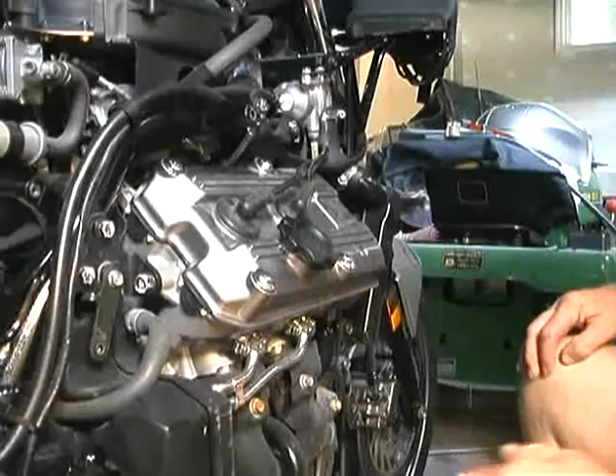What you're seeing here is the starting place. We stripped all of the Tupperware off of the bike in order to get access completely to the valve covers and the top of the head. If you just want to check the valve clearance, you don't have to remove all this stuff, but to get the access that you need to actually do the adjustment and remove the cams, you do have to get it pretty well stripped down so you can get to it. Mostly you need to be able to see.

So starting here, we're going to remove the spark plug wires. Get a wrench here and take these valve cover screws loose.

I don't have a thing, Fred, to put parts in. You see any old newspaper or anything laying around over on the other side? Yeah, I could lay, yeah, that'll work. There's a white plastic bag. It's probably pretty dusty. Some of that stuff there. Nah, that'll work. We're not going to remove very many piece parts.

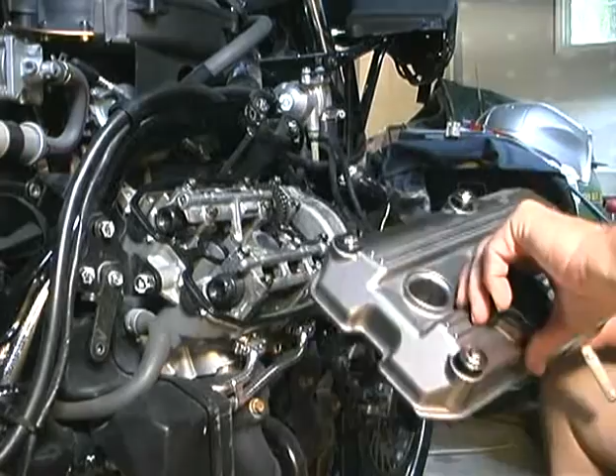Okay, these 4 screws here remove the cover. These 2 actually just hold this front cover onto the back, and if you're working like replacing a timing belt, you only have to remove the front part of this cover. We can get this gasket off here. Probably just going to have to leave it peeled up there.

Okay, what you're looking at now are the 2 cams, intake and exhaust. This is the exhaust cam, this is the intake cam. We'll be measuring the clearances, which are actually, you can see here at my fingers, these 2 valves, these 2, these 2, and these 2. And to check the clearances, you've got to get the cam rotated around so that you're measuring at what you call the base circle, which is the smallest diameter on the cam.

So, need to remove one more piece of hardware here before we start trying to measure this. In order to get this turned to the right place, we need to see where the crankshaft is. We want to get these cylinders into the firing position when we measure the clearances. So, okay, this is on the front of the timing cover, and what's here is a wheel that rotates with the engine, and it's got marks on it to tell you where the crankshaft is.

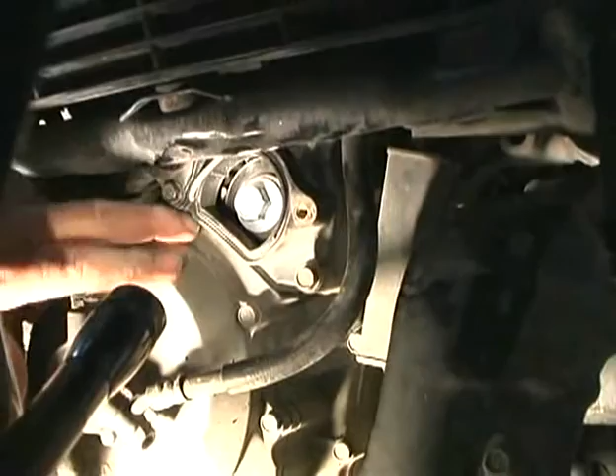They're called a T1 and a T4 mark. And I'm going to have to go back and look in the book again to see which one is for which bank of cylinders. All I can remember right now from what I read was you start with T1. There's a pointer right here that's molded into the edge of this opening, and this is what you use to align the marks to. And now we can find the marks, which are on that wheel somewhere. I believe I see them right there.

It's going to be pretty hard to see those with the video camera because there's just no contrast. They're molded into the front of this black plastic.

Okay, we're having to stop here and take the spark plugs out because trying to roll the motor over and get the marks to line up on that wheel, the place at which the marks want to line up is right where one of the cylinders comes up on top dead center, and the compression pushes it over to one side of the mark or the other, and we can't stop it exactly where we want to.

Okay, with the plugs out, we found that the engine rolls over easy enough that we can actually turn it using the nut that's on the front of that pulley. And I'm going to ease it up here until we get these cam marks to the spot where they're supposed to be. I believe I gotta go one more revolution here.

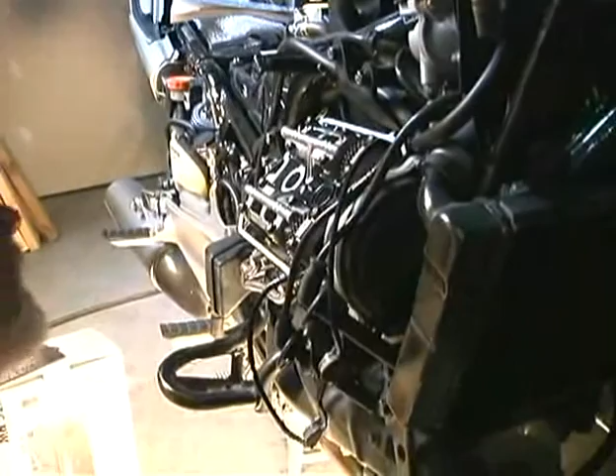Okay. It looks like we're going to have to rotate this engine from valve to valve to get the cams exactly where we want them. What I've always done is when I get ready to measure one is to make sure you've got the lift part of the lobe up on the high part, and that means the bottom side of the cam, the base circle, is against the lifter, and that's where you want to measure the clearance.

So we're gonna get a feeler gauge here out of Peter's shim kit. I believe that it has come with both metric and, okay, this one is marked in both English and metric, and this one is marked just in English, and these blades are a little bit smaller, and that's the one that I think I would like to use. So, no, this is in millimeters. And I believe I'd rather go back to the one that's marked off in inches, in English units.

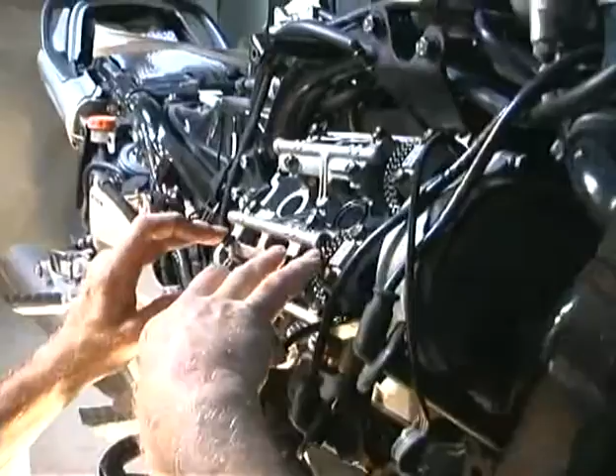These things are supposed to be somewhere between, oh, let's see, this is the exhaust. This cam right here is the exhaust cam, and so all four of these valves are exhaust valves. Two valves per cylinder, or two valves instead of one, just to get the necessary diameter they're looking at.

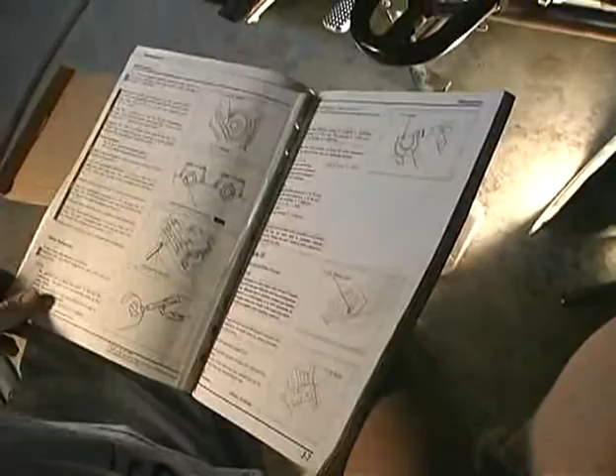Look at the clearance that they want when the valves are closed. Okay, the exhaust valve is supposed to be between 9 and 11, and the intake's between 5 and 7, and so I'm going to shoot for mid-range to loose, which means 10 to 11 for the exhausts and 6 to 7 for the intakes. The reason being, as the engine wears, the valves tend to wear in the seats, and they seat deeper with time.

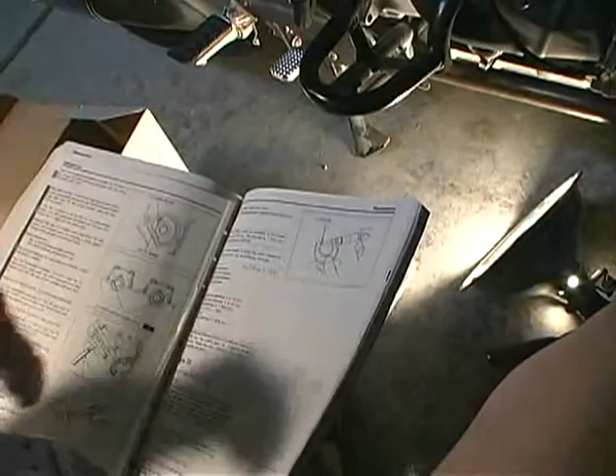And as they seat deeper in the head, they're upside down, they get closer and closer to the cam, so the gap tends to close up. So if you set them, you want to set them towards the larger of the tolerances, or maybe to the mid-range. Okay, let's do some measuring and see where we are.

Okay, we got more than 5. Let's try for 9. We don't even have a good, well, yeah, we do. We've got 9 on that one. And we've got 9 on that one, and 9 is the bottom of the range. That's the minimum that they should be set.

And now I'm going to crank the engine around some more here with this handy dandy little screw. And we're trying to get these 2 cam lobes back here where they are facing up like that. And we got the high part looking at us here, which means the low part is down next to the lifter, and we'll see what we got here. Okay, we've got a good 9 right there.

Now you're going in from the top or something this time. Well, it's just optional on both. Yeah, you can approach it from the top or the bottom, just whichever seems to be the easiest from an access standpoint. We got a good 9 on that one, and then a pretty good 9 on that one.

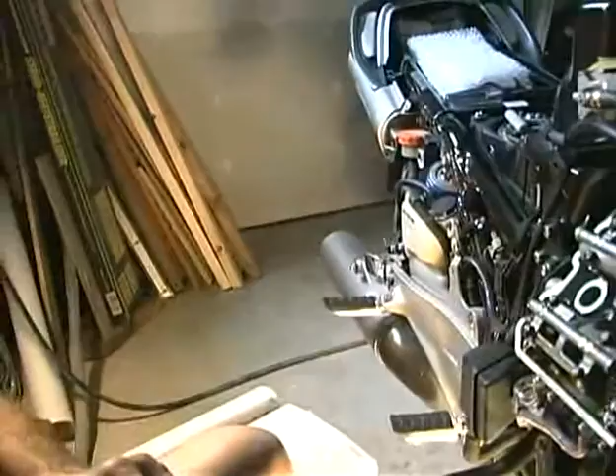So it looks like all 4 of these exhaust valves are set at about 9 thousandths. That's the bottom of the range, and I guess based on what kind of shims are in the shim kit and what kind of shims are in the bike, I may choose to bump those up about 1/1000th of an inch or maybe 2. So what we need to do, Fred, is to get some pencil and some paper and write down what clearances we're measuring in order to know what we want to do when we take the cams off and actually get in there and see.

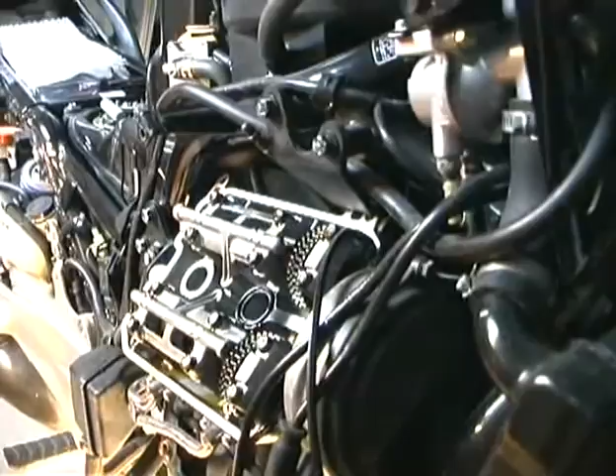Recorded what we had on the exhaust valves, and now we're going to roll around here and put the lobes up on this first cylinder for the intakes and measure them, and they're supposed to be 5 to 7. And we're going to take a look here at 5 and see if we can get a... Show me those lobes. Point to those lobes up, Bob. Okay, right here. I see them. Do you need my flashlight to get a better shot? I got it. I'm not able to get a 5.

You know, one of the problems you have with feeler gauges is the thinner they get, the more flimsy they get. And it's really hard to get enough pressure on it to push it in there. I might say a word about the feel of these things. If it just slides in there, and there's no friction at all on the blade when you've got it stuck in here between the cam and the lifter, and you can just slide it in and out, that's not the right gauge. You need to go one thicker.

The one that's right is one where you have to exert a little bit of force and maybe wiggle it a little from side to side to get it in there between the cam lobe and the lifter. You don't have any fear of pushing the valve open just doing this with your fingers. If you can get it in there at all, you can be pretty much assured that that's about what the clearance is. But you definitely don't want the case where it just slides in and out with no friction on it at all. That means you don't have a thick enough blade yet.

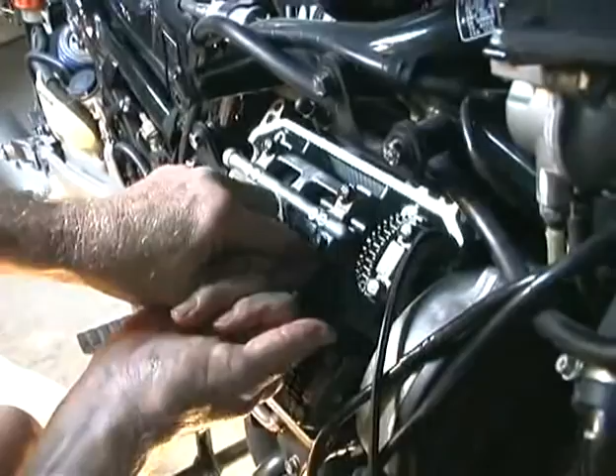My guess is that it probably is something in the neighborhood of maybe 4 and 3/4 or so. But I'm having a hard time getting a 5 blade to go in there at all, so I'm going to call it a loose 4, which means that's a little bit below the minimum clearance, and so we want to do something to that. And I'm just going to write down 4 plus here as a setting. And now we're going to crank the motor around a little bit more.

Now you're not looking at any marks? No, I'm not looking at the marks. I'm just watching the cams for this part. Is there some other part of the procedure where you look at the marks? Yeah, when we get ready to take the cams out, we're going to have to look at the marks. Okay. So I'll roll this one around now until I've got the lobes up at the top, and we'll measure the other 2 intake valves on this side and see what we got there.

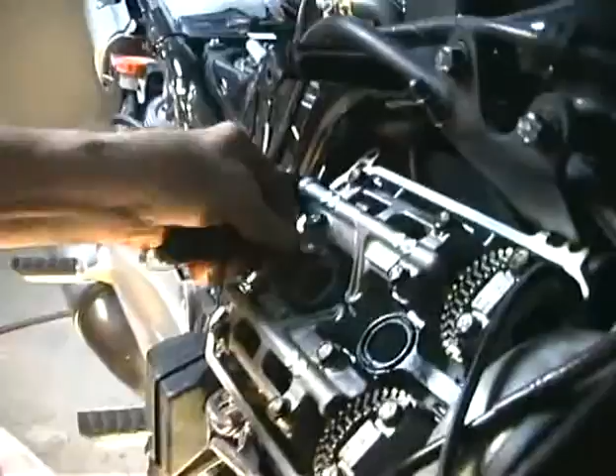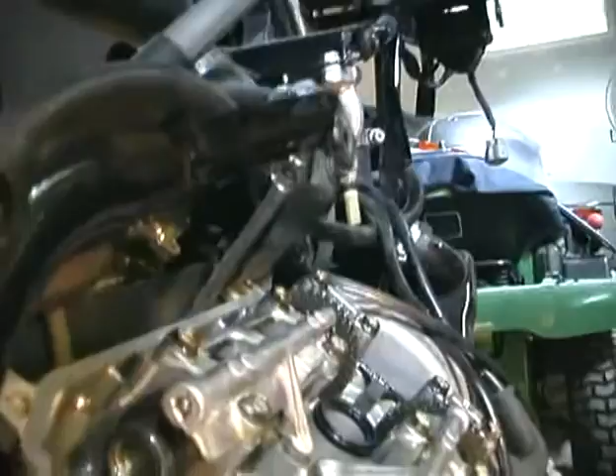Really not able to get a good shot of what you're doing. Well, come around to the other side. I don't know if it would help any, but yeah, I think we can get it. There's plenty of visibility on this one. What we're going to get right in here. Can you see? Oh, yeah.

This area here, this is the bucket as it's called, which is sitting on top of the valve stem, and then this is the cam lobe, and what we're measuring is the gap between this bucket, right in here, and the cam lobe. And we're trying to get this feeler gauge stuck in there. That's good. And this is another case where I can't get it pushed in there. And we'll try. Now this one goes in with no problem at all.

And this is a 5. So we'll go to 6 and see how the 6 will work. This one may be one we don't have to adjust. Oops. Lost it. Yep, 6 slides in there. Just about right. So we're going to leave that one alone. Thank goodness we got one on this side. That one's 4 plus, and that one's 6. And it will be satisfactory, I think.

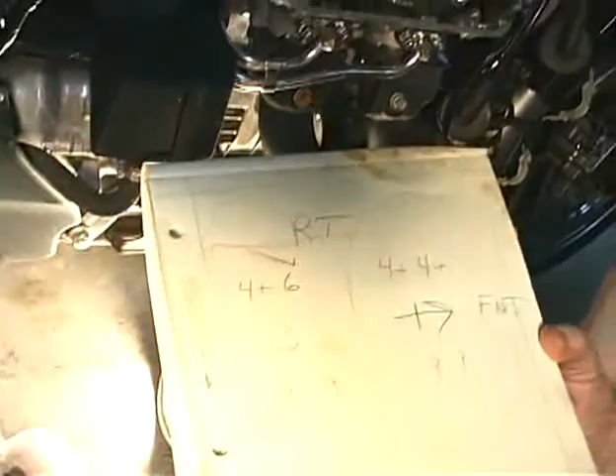Fred, I probably ought to mark on that. This is the right side, and this is the front. And what that means is that this is cylinder number 3 back here, and this is number 1 up here. Okay. And over on the other side of the bike, we're going to have 2 and 4. So these are our clearances. This is the cylinder number. This is the intake up here, and these are exhausts down here. Gotcha. Okay.

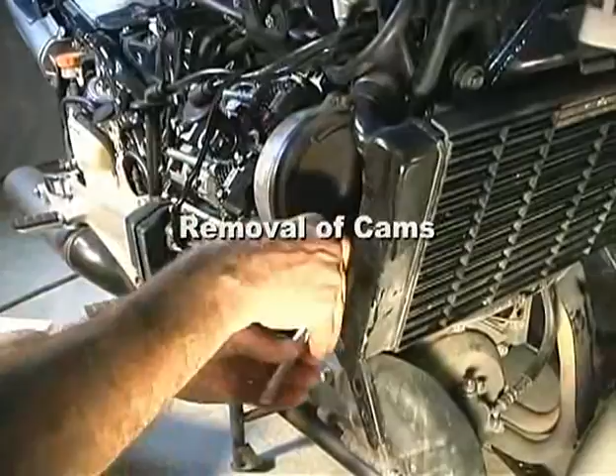Now I need to read a little bit. Turn that off. Timing case cover off here in order to be able to see where we are. The manual says that we should do that. There's 3 screws holding it on. Well, now, distinguish between looking at these marks and looking at those marks. Well, they'll all line up. Everything will line up when it's right. And it's just kind of a double check.

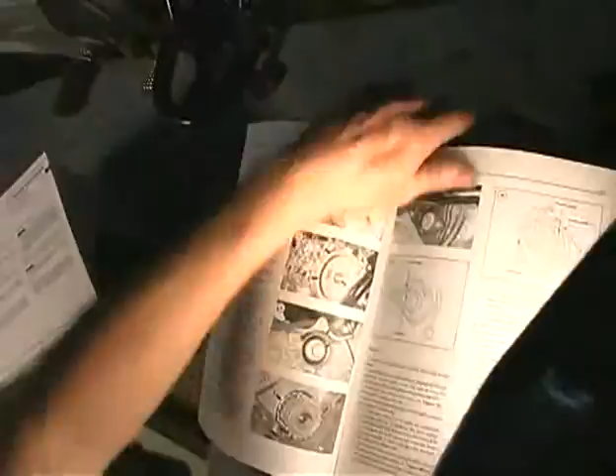Okay. Since the cams are driven at half the crank speed, 2 revolutions of the crankshaft is 1 turn of the cam, and so you got to figure out which revolution of the crank puts the cams in the right place, and that is unique to this mark right here. Okay, we're going to go back here now and try to get the T1 mark in this little hole lined up, and see if that puts us in the right position up here at the top.

There's 2 sets of marks on this wheel. It's what they call a T1 mark and a T4. That's definitely the one right there. And say again what you just said. Well, we're checking here to set the T1 mark at this pointer because we're working on the right-hand cylinder bank. If we're working on the left hand, we'd be setting the T4. And we're going to come out here and see if we've got the cam in the right place.

Now we got to do some searching here. I believe that we do not. Let's see what the book says here. The T1 mark is in the correct position down here, and now we're checking this pointer, which you can just barely see here on the edge of the case, and this mark right here on this cam. There's a notch right there on that tooth. And we're checking to make sure that those two things are lined up.

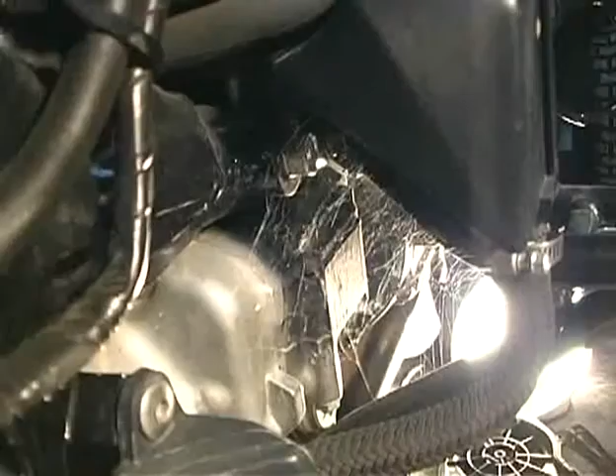Hello, what is this? This bike has not been ridden enough lately. That's clear.

Okay, what we're going to do now are just some precautionary measures. We're going to block some of these holes that go down where the spark plugs live, and at the bottom of that there's a hole that goes right into the top of the cylinder where the spark plug screws in. We don't want to drop anything in there. And this is an oil drain hole right here. It goes all the way back down into the engine crankcase, and we sure don't want to drop anything down in it.

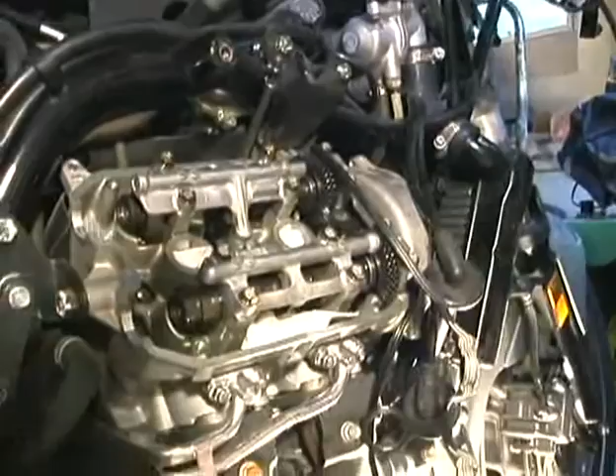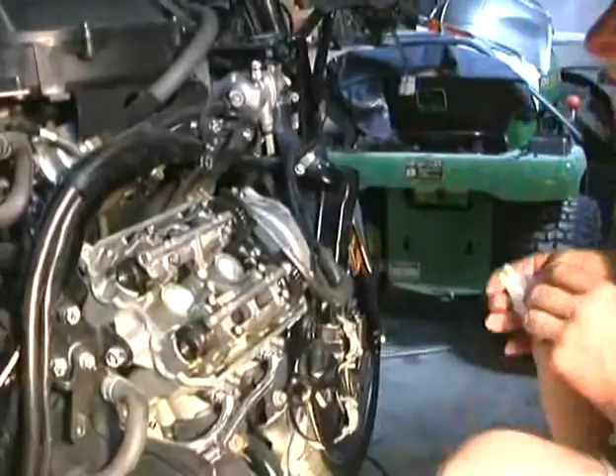And I don't know whether there's a bolt everywhere else, I think. I don't think I see any more places where we're likely to drop anything. So the next thing we want to do, and I don't think this is anything that is in the manuals, it's just something that has been recommended by some of the listers over time, is to mark the actual area here, the teeth, where these cam gears engage with the gear that drives them. That will help us in getting the cams back in there in the proper place.

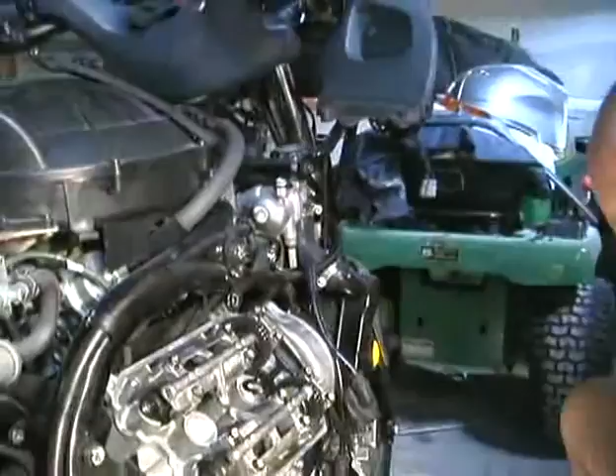If you look at the front of these cams, you notice there's two sets of gears here. There's a front gear, and then there's a gear behind it, and these are spring loaded relative to each other, so that they put a counter opposing force onto this gear, so that there's no end play in the cam. It's always firmly in contact with this, and when we lift the cam out, these gears are gonna move just a tad with respect to each other. So we're gonna mark a couple of things.

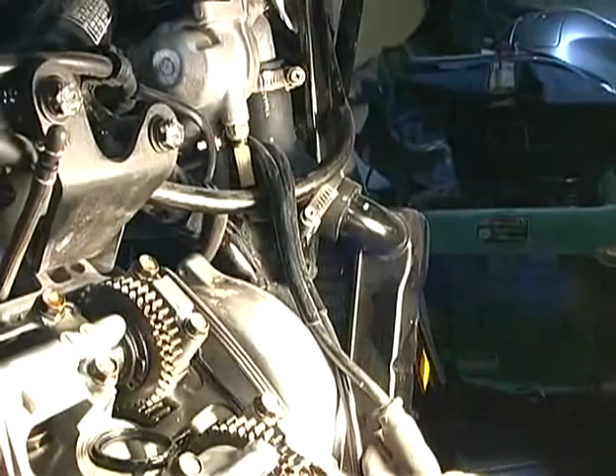I got some acetone here, but any kind of good solvent will work. One thing I'm going to do is get the grease off of the top of those teeth right there, and I'm going to get the grease off of this one. All this is for is to put a mark on here, so when we put these back together, we make sure that we've got these teeth lined up with each other. I don't know whether it's possible to get one tooth off or not, but we don't want to.

Okay, so let's put, oh yeah, that's going to show up well enough. Okay, now that'll take care of us relative to getting those two lined up. Each other, you mean? Yeah, to each other. See, it's going to rotate. The spring is going to cause this to rotate. I don't know whether it can rotate more than a tooth off or not, but since the back gear is the one that I'm going to mark relative to the driven gear, if it rotates, I want to know it.

So we're going to clean off a spot right there where those two gears mesh, and we're going to clean off a spot on the bottom cam where those two mesh, right down here. Almost get in there, but not quite. Yeah. And then we're going to put some marks on here, and hopefully we got enough grease off. I don't know whether we do or not. There's another Q-tip. Yeah, let's go one more round on that one.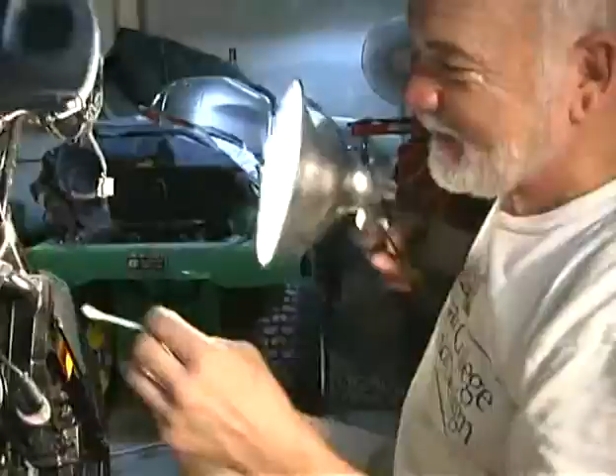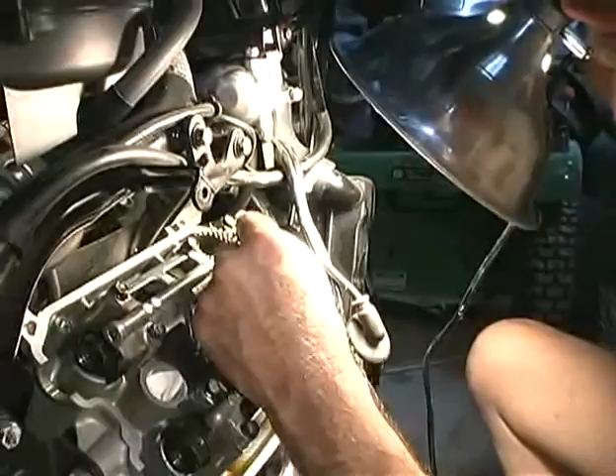You're supposed to say Q-tip, and I'm supposed to hand it to you. Oh. As in the operating room. Operating room. That little thing is in the damn way. Do I need to hold it? Well, use of that one word got us to PG-13. What's that? Damned. Oh.

I doubt if we can make it to R. Oh.

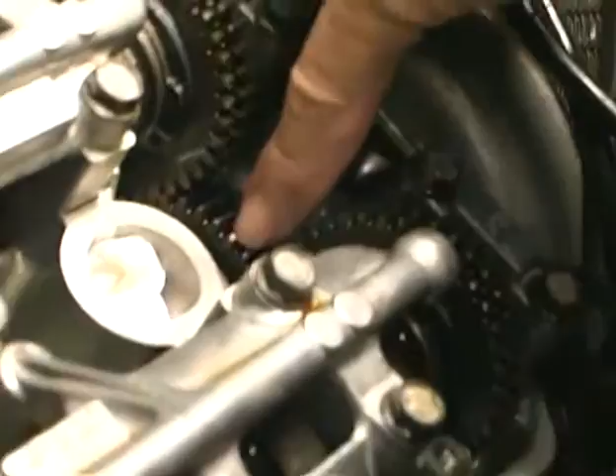Okay, we put a couple of marks down here, and I don't know whether you can see well enough. It's a red magic marker, not my choice of color, but it's the only one I could find, to mark the two teeth that mesh there, and also to mark the two teeth that mesh down there. And there's one more thing. I'm going to mark a red mark right there and a red mark right there that line up with these teeth. And so surely with all of those marks we're going to be able to get it back right.

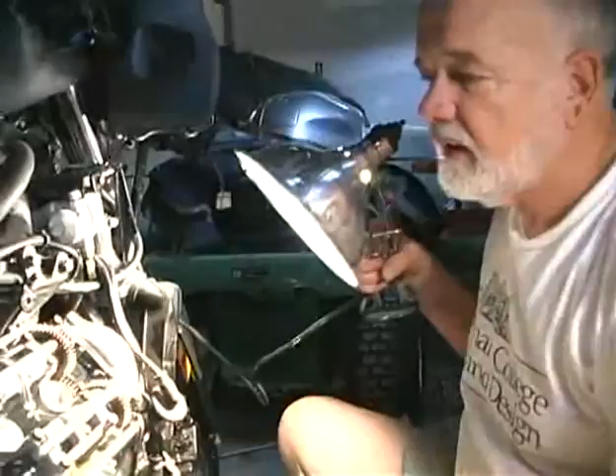The one other thing I'm going to do is mark these four center bolts with red because they are shorter on some motorcycles, and I don't remember whether this is one of them or not. Won't know till we take them out. They are shorter than the four outside bolts, and if you get them in the wrong holes and put the long bolts in the short threads, you can twist the bolt off before you get it tight, just thinking that maybe there's some friction in the thread. So it's kind of important to get these bolts back in the hole that they came out of.

And so now we're going to start removing these cams. If you'll notice, this cover's marked with an I. That's the intake. This one is marked with an E. This is the cover for the exhaust. These front caps are also marked E for exhaust. Well, now they're both marked the same. They're marked I and E. This looks like the same part number, so it does matter after you have some wear on the bike whether you put these back in the same place or not. So we want to be careful and get these back in the same position. So I'm going to put a U on this one for upper, and an L on this one for lower, just to make sure that we don't get those mixed up.

And now we're going to remove these cams, and the only thing to keep in mind when you do that is that there may be a little bit of valve spring pressure on some of the cam lobes tending to move this cam slightly up out of its bearing. So it's important when you remove these to just loosen them all evenly and continue to do that as you take the cam out. We got them all broken loose now, and we're just going to give it like a quarter of a turn, quarter of a turn, quarter of a turn.

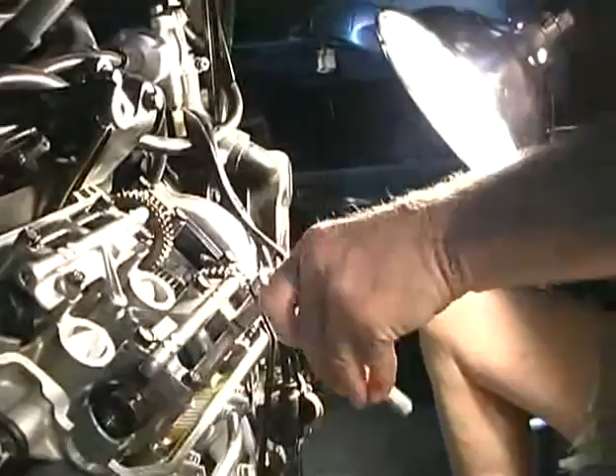The exhaust one is going to come off by itself without doing anything up here? Yes. Okay, it looks like we've got a good position on the cam because nothing is tending to want to jump up at us. So I guess we've got the lobes located at about zero. Well, there's a little bit of tension on that one. This may be the only one that has. Okay. We'll find out about the lengths of these bolts in just a second. I'm going to put this light down. Okay, we've got all the bolts loose now.

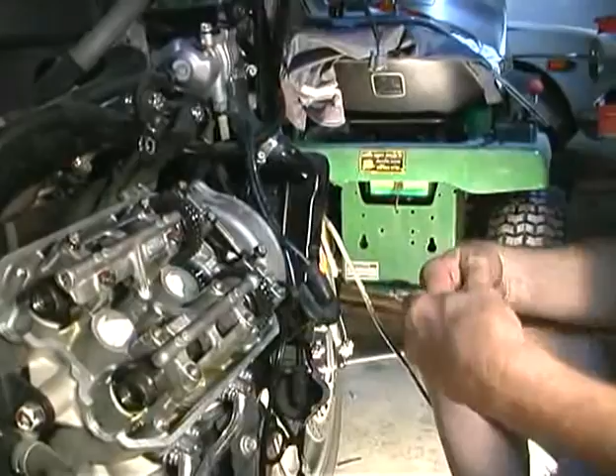We're going to start taking these out, and sure enough, there is a difference in length, and that's why you want to make sure that you get the shorter ones back in the shorter holes, and they're going to be the 4 inside holes, and then all the others should be the same length. So we'll only have to pay attention to the 4 that have the red tops, and there's 2 per cam. Yeah, the red marks that we put on there. So we'll set these down somewhere out of the way, and we should be able to lift off this cam cover if we can find the appropriate tool to prise it with.

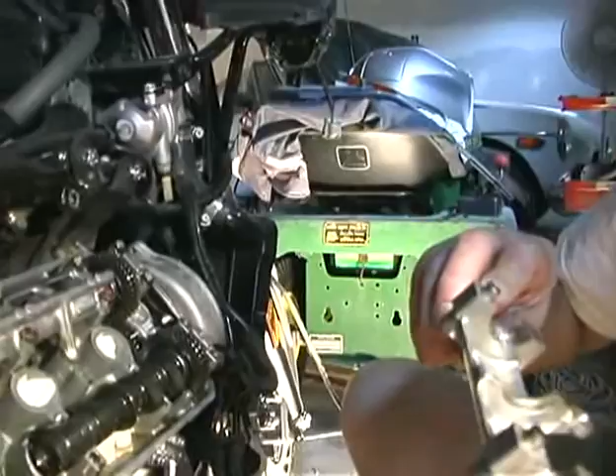Alright. Why is there not some action happening there when you're trying to lift it? Is this gear going to turn as it lifts out of there? Don't know. Something happened. Okay. What's that part called? I think it's just part of the cam mechanism that holds the cam in place. I thought the whole thing was going to come off in one piece. Oh, look at that, would you? Here's this one. How'd you know that little tap on the end is going to break it loose?

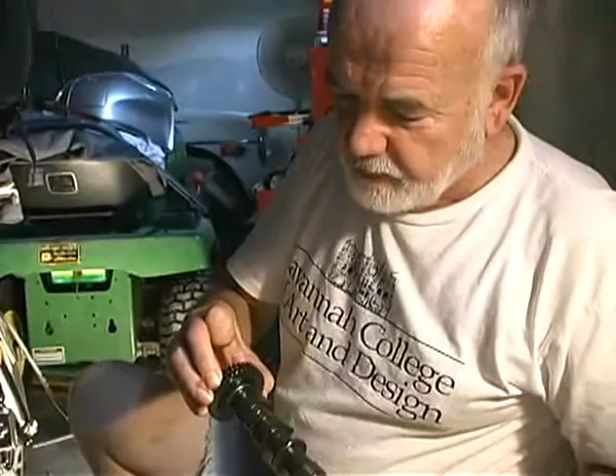Well, it's just kind of like a main bearing cap on a motor, and that's kind of the way you get them out. So we're going to lift this thing out. If you notice, these did not move all that much. These two, they're not aligned anymore, they're slightly off from each other. But we'll make sure we put them back together and get them lined up, because somebody on this ST list put his cams back in and forced this in the wrong direction and actually chipped a tooth off, and I think had to buy a new cam. So it's something to pay attention to.

And this we need to put somewhere where it will stay relatively clean. And now we're ready to use another item out of the shim kit that's in the purple box. You see the purple box anywhere, Fred? I think it's in there. There it is.

Are you going to do the exhaust completely before you move? I'm going to take a look in the exhaust. We won't put it back before we do the intake, but we're going to go ahead and... I'm talking about the shim part. If you have to change the shim, you're going to do that now? No, I'm just going to look at what shims are there.

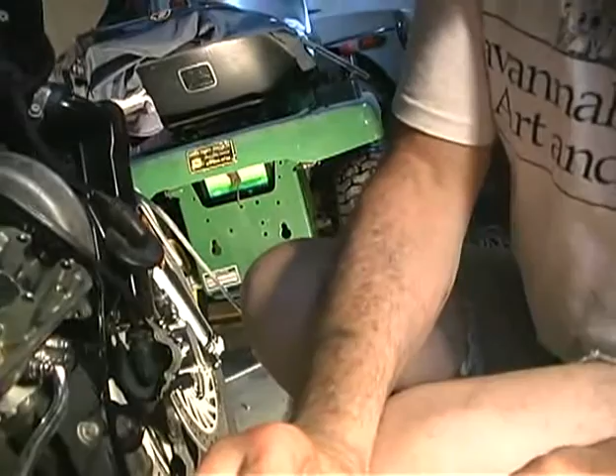This little suction cup that's in the kit is for the purpose of grabbing these buckets and pulling them out. Oh my gosh. And you're either going to find the shim in the top of the bucket, which is where it is in this one, or the shim is going to stay on the top of the valve. What you want to do is make sure that you don't drop it. You want to make sure that you've got it. And we're going to take these out and set them down here in the order that they come out.

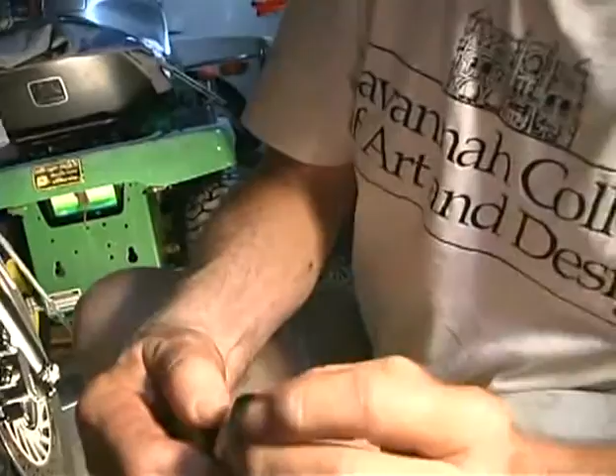Okay, that one is in the bucket. That one is in the bucket. It's just stuck up there. Oops, you can break it loose with your finger. And this one. It too stayed with the bucket. So there are the 4 exhaust ones.

This is, I would say, serious, high-level shade tree work we are doing here. Probably the most impressive shade tree work I've ever seen.

All right, now we're gonna take the top cam loose if we can find the right tool. This is a repeat of... Needless to say, the cams are different. You don't want to get them swapped with each other either. So we'll try to keep them straight. I'm sure they're marked somewhere, but I'm not sure I want to take the time to try to figure out how they're marked or where they're marked. I think it would be easier just to take the extension out to do that one.

Looks like you're about to run out of space on top of this white box to put stuff in. The big old thing, something. Oh, yeah.

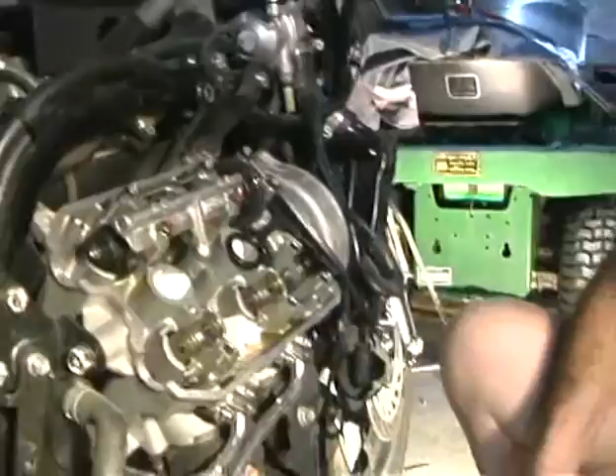Interestingly enough, this little appendage right here is an oil passage, and when the engine's running, oil is squirting up through here and along this gallery and then coming in through these holes in the top to lubricate the cam. I guess turn it off, Fred, and we'll shut the cam off. I guess the next thing we'll do is go in there and look at the shim values that we have. They're all stamped, but I suppose it's possible with wear for the markings to wear off of them, but none of the ones in the kit seem to have lost their marks, and I'm sure some of them have come out of somebody's bike.

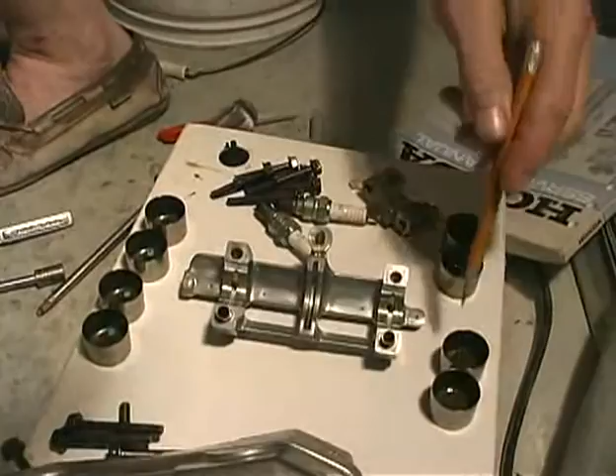A new sheet here. Okay, you ready? Okay, we've got the other intake cam off, and we've removed the 4 buckets there, and we've got them all sitting here upside down, and the next thing we're going to do is to take the shims out of these buckets and record what values that we have. So I think we'll just duplicate what the inside of the head looks like, and we're going to write shim values in each one of these circles.

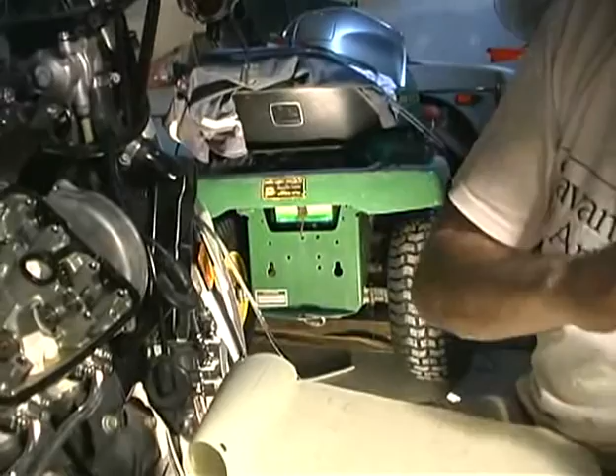So we'll start with this first one right here, and I may have to get you to help me read these, Fred, but is that 215? Yep. Okay, 215. It was a little bit worn too, looked to me like. Alright. What units are these measurements, by the way? That's 2.15 millimeters. Oh, 2.15. I believe that's the way they're marked. And the reason they are different is manufacturing tolerances? Tolerance on the valve length, on the base circle of the cam, and wear. How interesting.

There's a 2. Look at that one. I think that one's a 228. Yeah. Some big ones. Sure would go down into one of those holes really easy. That's why we put the toilet paper in. Yeah, definitely. I'm sure that it's happened before. It's just a disaster, because if it goes down a spark plug hole, you'd have to pull the head off. If it went down the crankcase, that wouldn't be so bad. You'd just need to find a replacement for it.

Well, this one's worn to the point where I don't believe I'm going to be able to find anything. Take a look. We're going to have to measure that one, and that's why the shim kit has micrometers in it. Okay, for the shim that we're not quite sure what the last digit is, we're going to use one of the micrometers that's in this kit. This is, I guess, Peter's micrometer. It's a metric micrometer. We just checked it here with a known shim thickness of 222 to make sure that we had the right value.

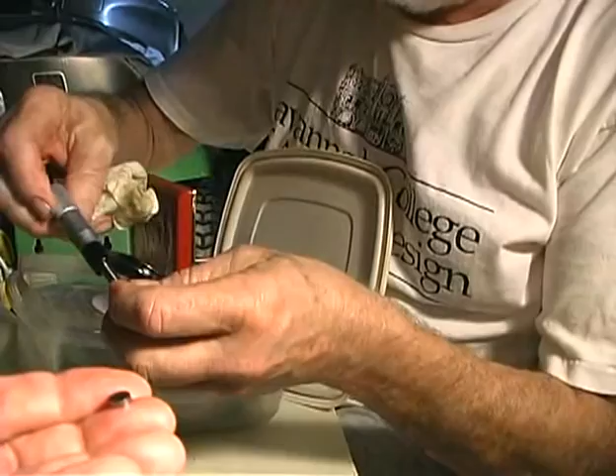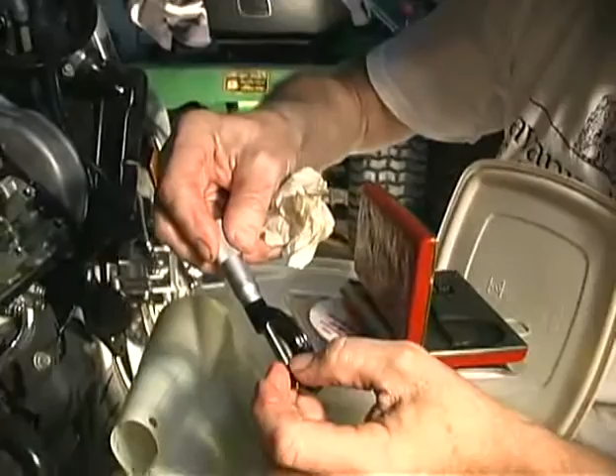And if you notice, we've got two marks visible here past the 0. That's the first 2, and then here's 20, 21, 22. So that one is a 222, and the one that we're not quite sure what it is, we're going to put it in here and give her a twist and see what we wind up with. Looks like it's a 217 or maybe 218. Is that what you thought it was, Fred?

Either 217 or 218 is what I thought. I think the 218s will measure 2175. I believe John O. discovered that the half sizes go to the next. This one is reading 2175, so we're going to call it a 218 for purposes of what we're doing.

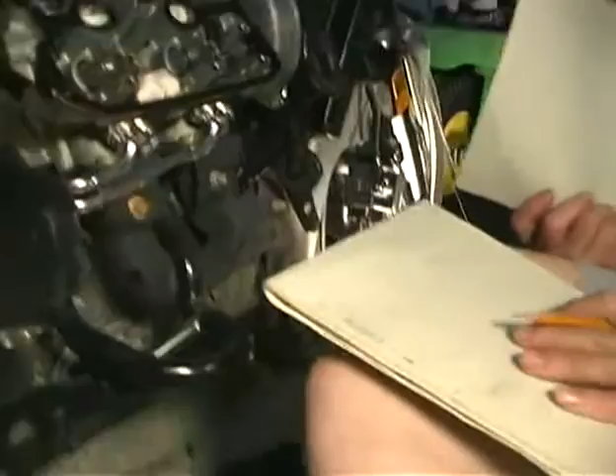Okay, what we're going to do here now is put in the shim size information we have, and incidentally, lots of folks after they do this once will keep a permanent record of what these values are, because that way you can measure the adjustment and know if you need to change your shim, you know what size you need. And with that, if there's not one in the kit, or if you don't know somebody's got one that size, you could order it and have it before you ever started taking the bike apart.

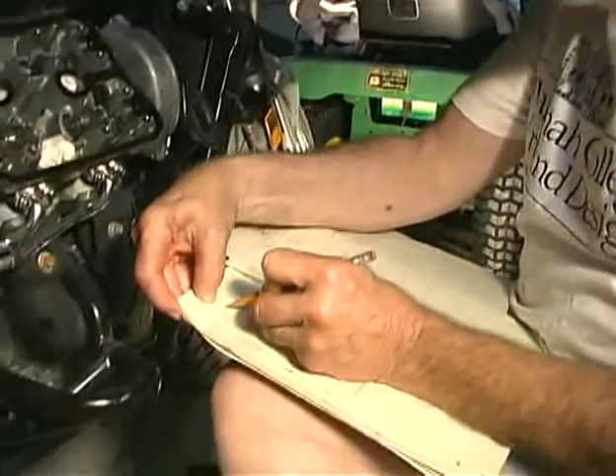What we're going to do is put the clearances on here, and these are in thousandths. And the process is pretty simple. I'd like for this to be a 10. So what I would really like to have is a 221, because I need to make the gap bigger, so I need a thinner shim. I need a 227 here, a 217 here, and a 221 here.

ST1100 shim analysis, take 2. Well, I didn't paint my bike another color. We've actually moved to a different location, and we're redoing something that we did in the original video. It was pointed out to us by Al Barth that it was in error, and he was certainly correct. What we did, and you saw part of it with the music and the sound: I was trying to subtract thousandths of an inch from millimeters and get millimeters, and that's not the way you do it. So we're gonna go through this shim calculation one more time, and this time hopefully we'll get it right.

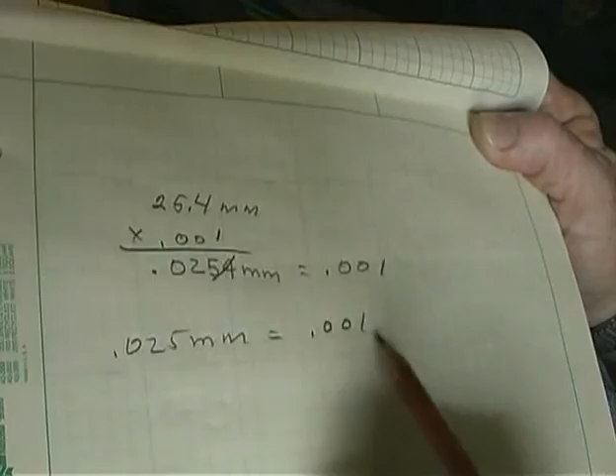So if I want 2 thousandths of an inch increase in my clearance, then I need to make a change here of 2 times that, or 0.05 millimeters. So this is the value we're going to be working with, rather than the 2 thousandths. So if we come back on this page and I've got a 215, I want to subtract 0.05 from that, so this shim should be a 210. This one is okay. This is 6 thousandths. We're not going to do anything to that one. This 210, to change that by 0.05, I need to make this a 205. And this 212, to change it by 0.05, I need to make that a 207.

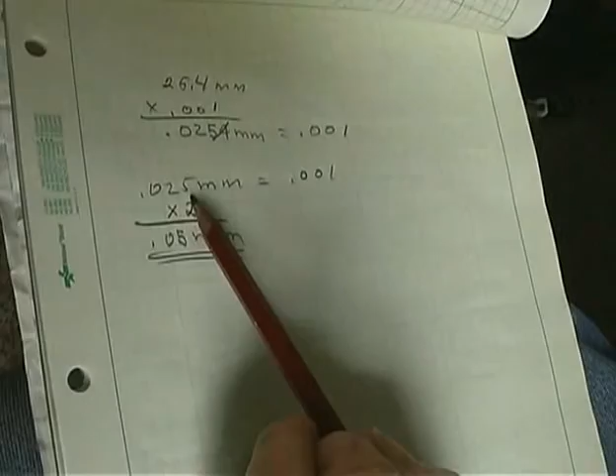7. Same situation exists down here. This is 9. I'd like to get into the middle of the range, which would be adding or taking 1,000th away from each one of these, and 1,000th is 2.5. And so what we have to decide is what we're going to do, because the shims come in 0.01 millimeter increments. So we have to decide if we want to change it 1,000th.

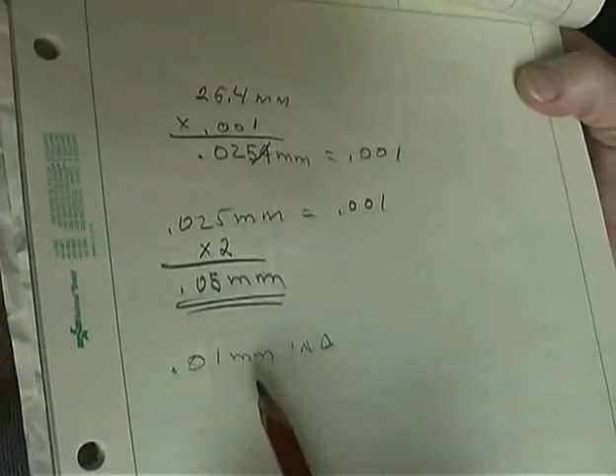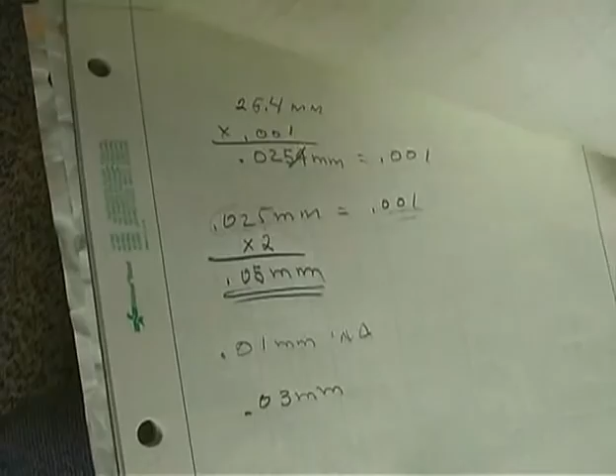We'd need to make a change by 2.5 here, 0.025. And so let's go ahead and round that off to 0.03, and that'll give us just slightly more than 1,000th of an inch change in our clearance. So we'd subtract 0.03 from each one of these, and we'd come up with our new values.

Here would be 219, 225, 215, and 219. And that's changing the clearance by approximately 1,000th? Yeah, 0.025 would change it by 1,000. Okay. So 0.03 is going to change it by about 1,000th, and just a tad more. So these are going to be in the 0.10 plus range, which is okay.

I believe the requirement is 9 to 11. So to get out in a mid range, with a 1,000th plus change, would be just a little bit to the loose side of mid range, which would be 0.10.

Found one shim in the kit that would work, and we can shuffle some shims in the bike, and we can get all of the intakes in good shape. And I think, based on the fact that I would have to buy 4 shims and wait for them, I'm going to leave the 4 exhausts at 009, which is the bottom side of the clearance. I'd like to have a little bit more than that, but just for today, we're just going to leave it where it is.

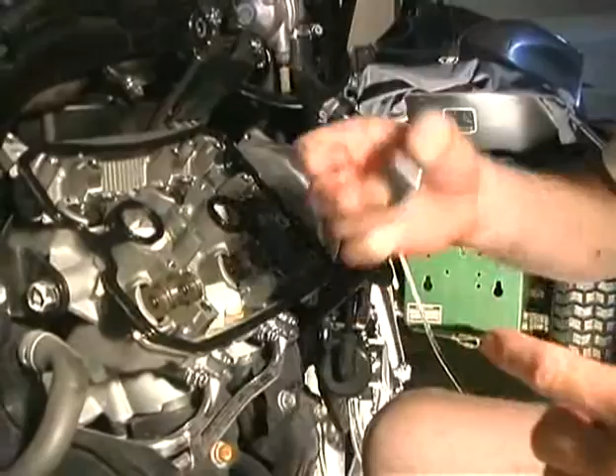When you replace them, you put the shims in these little cups that are in the top of the valves. It'd pretty much be impossible to get the shim centered in this bucket well enough to ensure that when you put it back on, it would go down in the place for it in the valve. So you just put it in there, and you can see now I've covered up that hole, and I'm getting ready to put this bucket back in there, and that'll be the end of that one. Is that the bucket that came out? Yes, it is. It's the one that came out of that hole, and that's important.

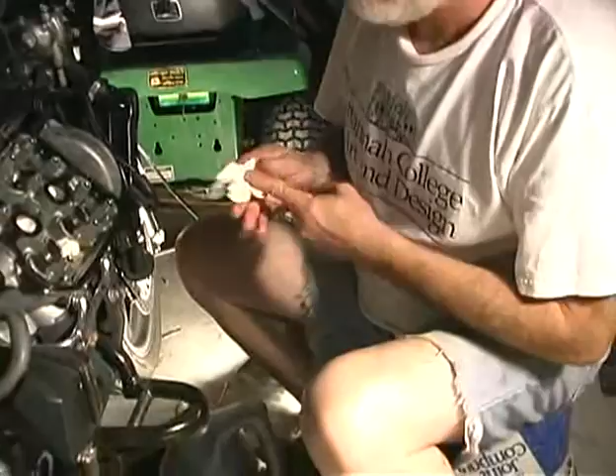We've got all the buckets and shims and everything back in there now, and what I'm getting ready to do now is just one of my old maid precautions. I've wiped the tops of all of these buckets off, and now I'm gonna coat each one with some Mobil 1 here to make sure we don't put the cam back and it have a dry surface to rub against. This is the same red cap Mobil 1 that they use in the crankcase. Same thing, it gets pumped through here when the engine is running.

Are you using that now? Huh? Yeah. Are you? Yeah.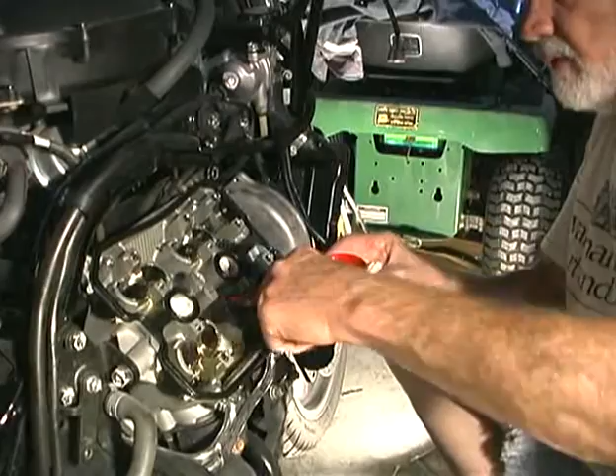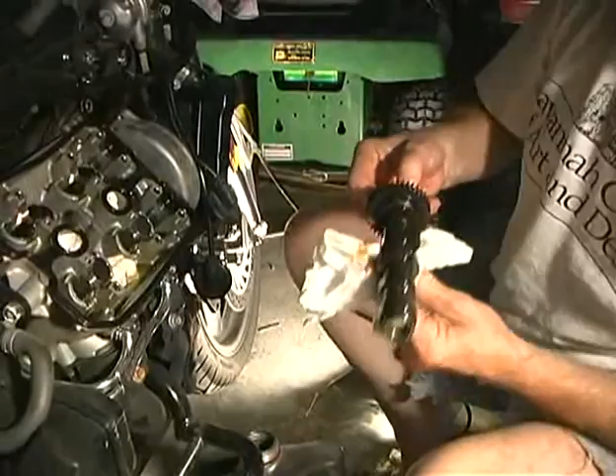I'm also doing this in the cam bearing area, although it looks pretty moist with oil from pulling the cam out, but it can't hurt. Okay, now we're ready to stick these cams back in here, and that may get to be exciting. After you take out the paper. Yeah, probably. This is the exhaust cam, which goes down at the bottom. This is the intake cam.

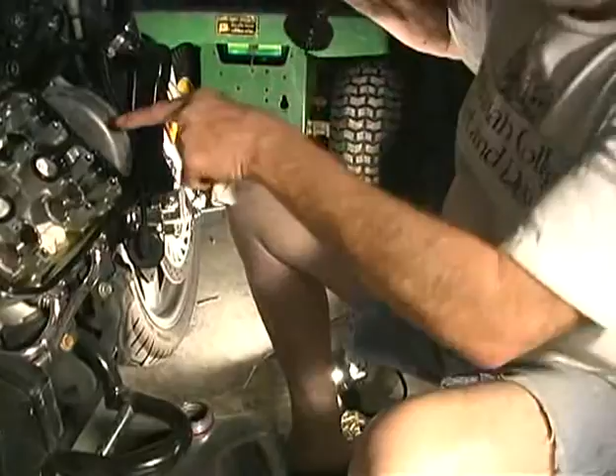Okay, now the secret here is to get the tooth that we've got the mark on engaged in the right place here on this driven gear as we set this cam back down, and to get these teeth lined up. And if we do this right, it ought to all happen kind of at once. I'm going to set that cam in there and see. I believe it's probably about a tooth off, or two. I'm going to rotate it like that, and take a look at it with my flashlight, wherever my flashlight is. And we are a tooth off.

We're going to pick this cam up and rotate it one tooth. And now, whether you can see it or not, I can see it. I don't know about the camera. But we've got our marks back together there. And when we pull it down tight, these marks should come back into alignment.

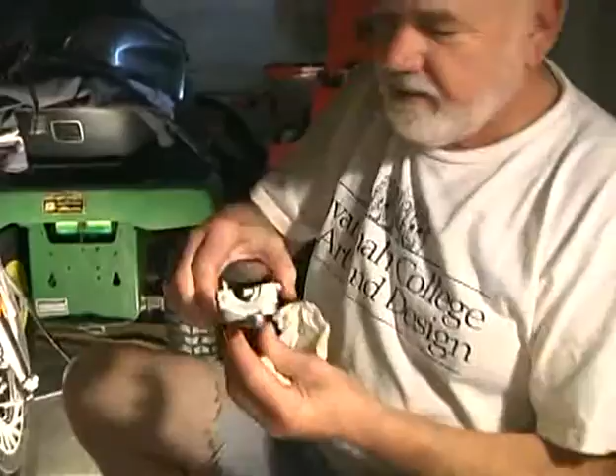So we're ready to put the top cap back on that one. And the only thing we need to do here is make a double check that we do have the intake one and not the exhaust. And we'll put a little Mobil 1 here on that one to make sure we got them all slicked up.

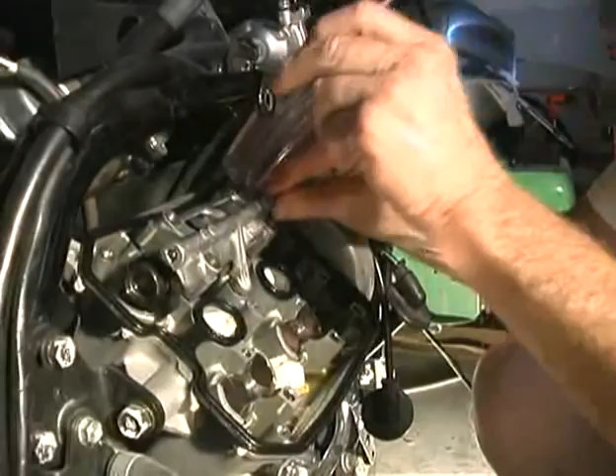And we'll set that guy down. And if we had a soft nose hammer, we'd tap on it, but we don't, so we'll use this screwdriver. And you can tell from the sound of the... no, it's down as far as... it's down. The only thing important when you put these back on is this nose piece, this little gizmo, got to be pointing out, and I think that's probably common sense. You know, that makes the part number upright where you can read it too.

Put a little Mobil One in that guy, and put him down right here. Now we're going to find some screws. I believe these are the ones that came out of there. Find our two short ones and set them here so we don't screw up, and then we'll put these others in place. And we're going to run those all down hand tight, and then we'll start pulling them down in case there's any slight compression of the valve springs.

We'll pull them down a little bit at a time till we get them all tight, and then we'll get a torque wrench out and torque them to the proper value. It's down a few turns or fractions of a turn at a time until all of these snug up tight, and then we'll get the torque wrench out, and this is just primarily not to put any undue stress on the cam. You just kind of go around in a circle, or you can crisscross. It doesn't make any difference. Just need to get them all pulled down evenly.

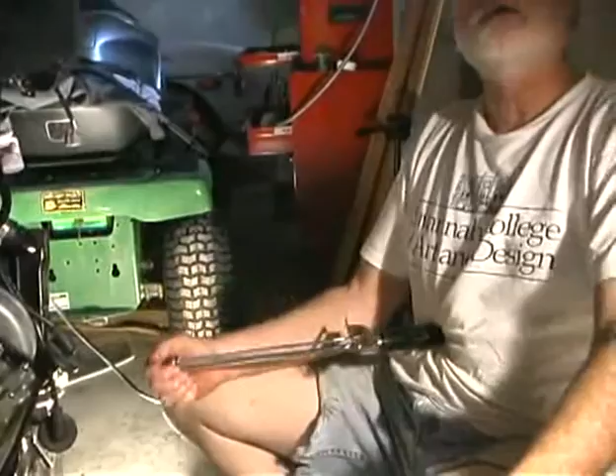Getting close now. Nine foot pounds is how many inch pounds? 108? 9 times 12, yeah, it's 12 inches to a foot, so it'd be 108 inch pounds. Okay, what we've got here is an inch pound torque wrench, a beam style, and we got our torque reading in foot pounds, and so it's 9 foot pounds, and if you multiply that by 12 to get inch pounds, it comes out to be 108. So we'll be shooting to get about 108 inch pounds of torque on each one of these bolts.

I'm going to pull them to about 50, and then I'm going to go back and... Is there an order that it recommends? I don't think there is an order for it, but that's a good thought. I'm going to just start tightening. Since these are two separate pieces... if this was all one cast piece, it might be wise to start in the center and work your way to the ends. That's what you do on a cylinder head on an automobile. But it's just 4 screws, so we'll just tighten them down. We're gonna pull this thing to about 50 first.

There's 50 on that one. 50 on that one. 50 on that one. 50. 50. 50. And what I like to do is just kind of get a wrench and kind of feel how tight these things really are. I'm tightening them a little bit now, but I'm certainly not exceeding the 108. But I just like to know about how tight they are. I always worry about twisting bolts off. Those feel just good and snug now.

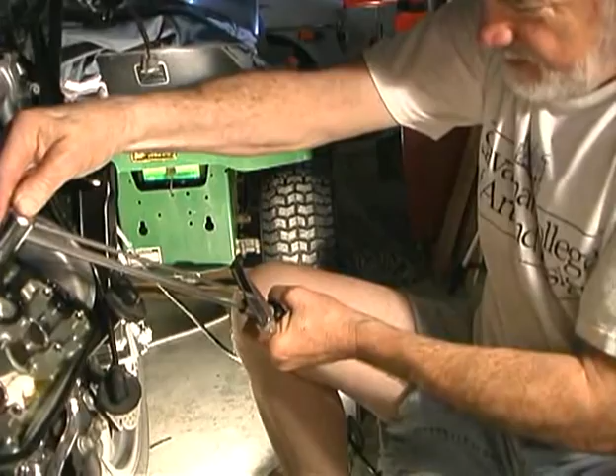Okay, let me look at this thing in some bright light and see what these graduations are. Every graduation on here is 25. So 108 would be a third of the way between those two marks. I don't know how close I can get to that. I always thought those torque wrenches, unless it was just me, seemed kind of crude or something. Well, it's utter simplicity. The good thing about an old beam style torque wrench is it doesn't ever need calibrating. If you got the style that clicks, you never really know whether it's calibrated or not. Really? I usually just check mine against a beam style by just pulling the wrenches against each other.

And we'll let those sit there and stretch a little bit, and I'm going to go back and probably check them all one more time, and I'm just putting another thing of oil on there because that's been sitting a while and it's all run to the bottom. I'm going to pull this thing out here while it's easy to get to. We've got the exhaust cam sitting in here now, and got our red marks lined up with each other, and so we're going to repeat what we just did on the top one.

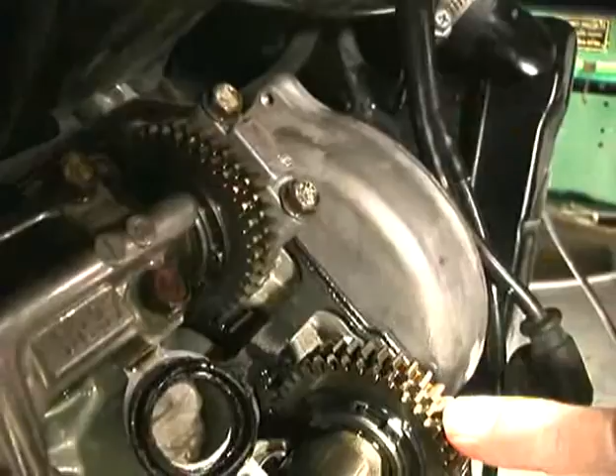Notice how these two now have come back into alignment. Magic. And they're misaligned like this when you start. And I don't understand why torquing it down made them come back. Because we're pushing the cam. It's not sitting in the bottom of this thing right now. Yeah. It's being held out by the fact that this thing is twisted. So as we drive it down in there, it's kind of like watching the minute hand on a watch, but you ought to be able to see these things rotate relative to each other and see that gap close up.

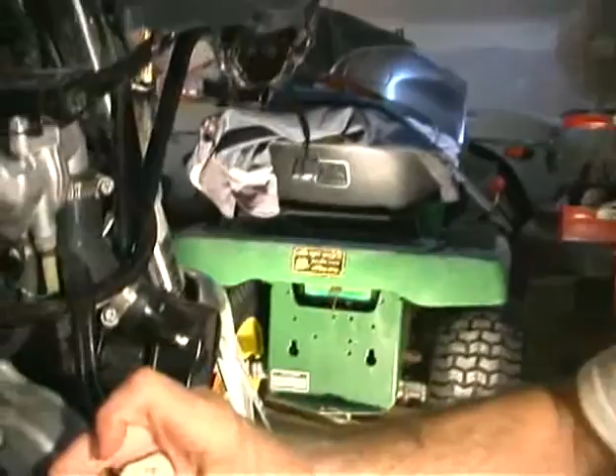Okay, here's the front one again, making sure we got the tab out. Put your flashlight on this mark. I'm going to really get it good this time. Move it there. There's different. For some reason the red, that looks good. So now that's before torquing down the cam. That's before we torque it down, right. And when we get through, you'll see that those marks have lined, those teeth have lined up with each other.

I'll put some. I don't think that's even a bearing. That's just, interestingly enough, this thing right here just runs up in there, and I wonder what in the heck that's for.

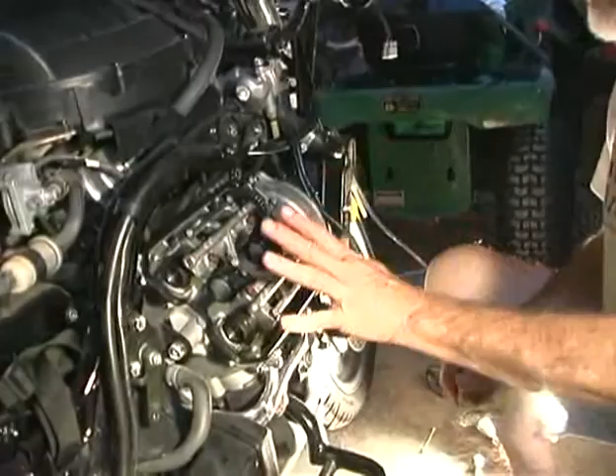Okay, what we did while the camera was off was finish torquing in the exhaust cam, and then, since we'd swapped shims up here on the intake side, I went back and measured each one of these as a double check to make sure that I had the clearances that I thought I had, and indeed I do. So we're ready to put the valve cover, or the head cover, back on.

And the way this gasket is made, it's got 4 places that really anchor it into the top of the head, there's two here and there's two in the front, and they're usually stuck pretty tight. I'm leaving the gasket on the top of the head, and I'm going to try to put the cover on it. The trick is getting this gasket seal in this groove that runs around the head, and the hardest part is these two right here in the center where the spark plug holes are, which you can kind of put your finger down in there and move it around a little bit. So we're going to give it a shot here.

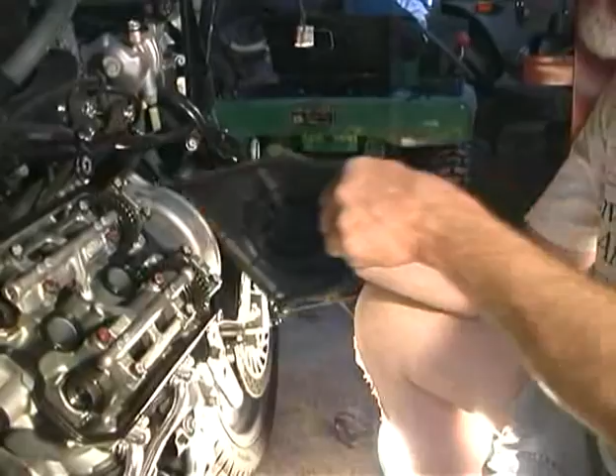Let's see. Now, we had to back up just a little bit. I forgot that I had taken this timing cover plate off, and we're going to have to put it back on before we put the valve cover back on, because once we do, we can't get to it. Front timing cover on, and now we're ready to try to put this thing back down here. And if we're really lucky and we don't disturb this gasket as we set it down, it may set right down on there, and we'll be home free. Let's see how it goes.

That's it. How can you tell that? Well, you look in here. Well, I mean, I can see how you can tell the ends. Well, you look at what kind of gap you've got. Okay, because of the ridge and the valley. If it's not seated, it'll be a pretty big gap. Yeah, it'll be pretty obvious to you that it isn't. But see, we can push that down essentially till the gap goes away, and the same thing's happening inside here. Way to go.

So, pretty sure that I got it back in there right. Got that one started though. No, we don't. This is straightforward here, so we're gonna terminate the video, I believe. And we'll be through over here, and I'm gonna go around onto the left side and start.

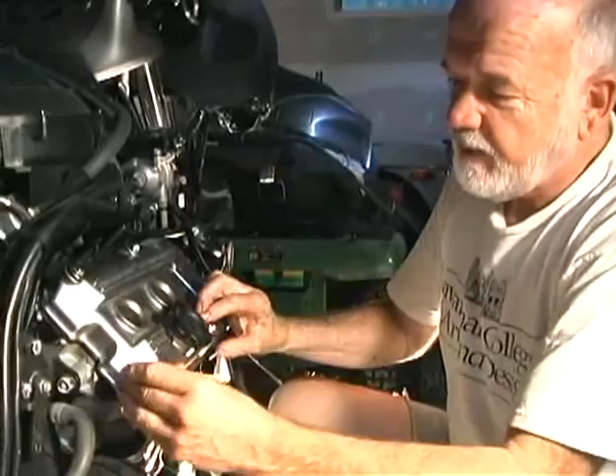Fred's about to run out of tape, and there's nothing different over there than over here, with the exception of the little wheel and the indicator that we're using up here on the front of the engine. When we got ready to remove the cams, we used a T1 mark to remove the cams on the right side. When you do the ones on the left side, you want to make sure you use the T4 mark. There's two separate marks on there, a T with two slashes and then a number. Oops, I don't have that down for you. It's up there.

If you get the T4 mark set right, and check the mark up here on the cam wheel, and you can kind of look at the cams themselves and make sure you don't have any cam lobes that are pointing down trying to open a valve, you should be in good shape to do the left side.